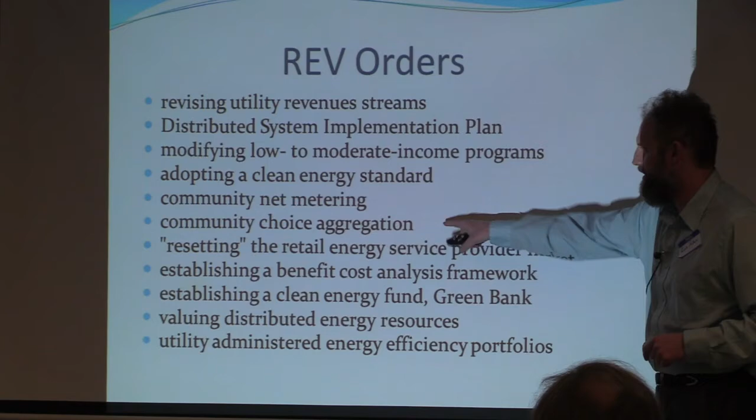Community choice aggregation, that's an ugly term for the solar gardens. So that's how you're going to get solar gardens in New York, and you can't do that in Wisconsin right now. There's an order resetting the retail energy service provider market. Complicated, I'll skip it. Establishing a cost-benefit analysis framework. So Gary was talking about those cost-benefit analysis frameworks his master's students are doing. They are actually doing those in New York.

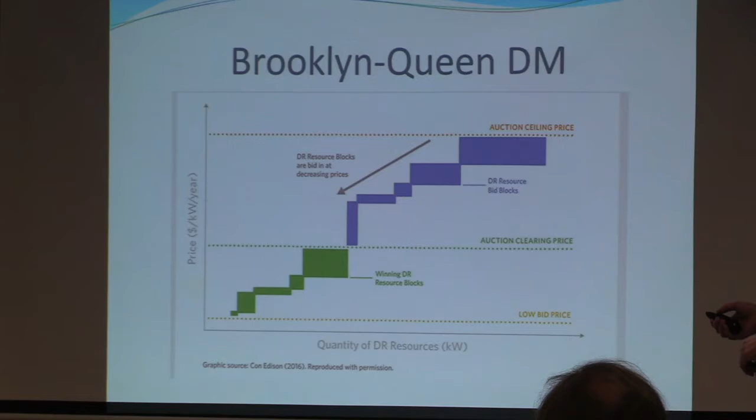There's a green bank to help on the financing side for distributed energy resources. And then there's a revaluing of the contributions from your solar to the grid. And then there's the energy efficiency portfolio. So it's a very extensive program of switching over the old system to the new system. And one of the really cool things, this is the program that got REV off to a start: there's a Brooklyn Queens Demand Management Project. I got the acronym spelled wrong here.

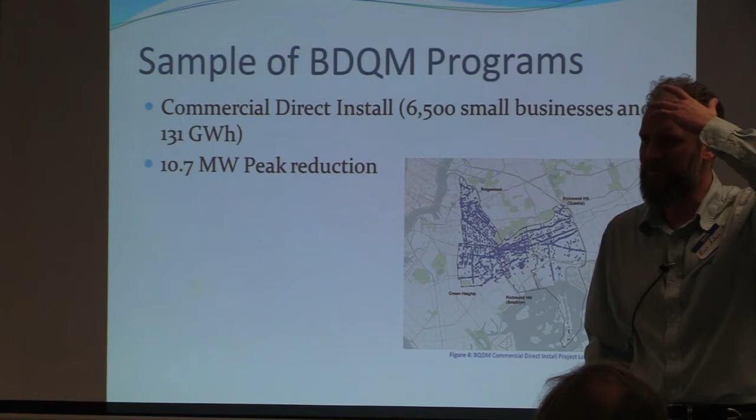But what happens, there's a substation in this area. It would have cost about $1 billion to replace, $1 billion. And so that looks like a really big capital expenditure. And so ConEd's first instinct is to replace it.

There's a couple of very well or fairly well financed energy groups in New York, PACE and NRDC, and they are ready immediately to pounce on this opportunity and say there is a better way to get the energy resources we need without doing a $1 billion expenditure. And in fact, it seems to be working quite well.

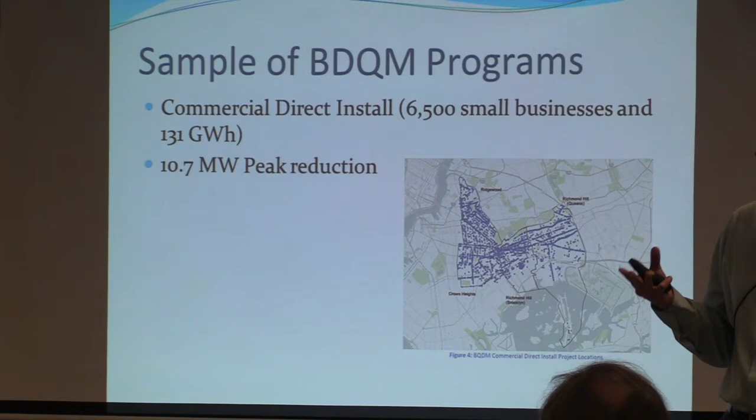What the New York Commission said is, okay, rather than doing this $1 billion capital expenditure now, we're going to put it off into the future. And instead, we're going to give you $200 million, $200 million instead of $1 billion, and you're going to use that money in order to do demand side management on the other side of the substation. So you don't need to replace the substation as soon as you thought you did, or maybe not at all.

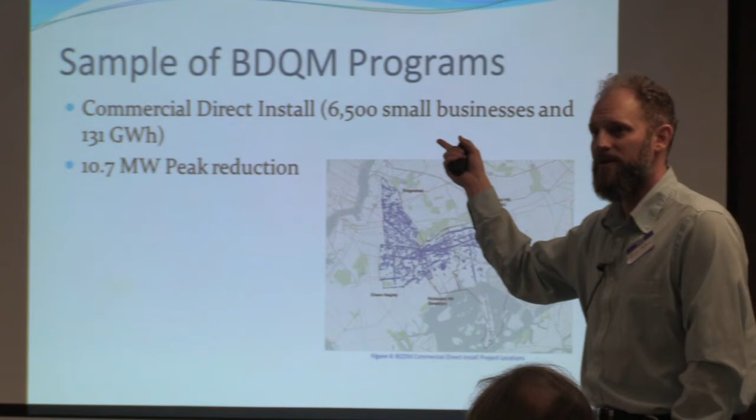And then you can take that $200 million and you can put it in your rate base. Right? So this means that the utility is getting paid for its work, and it also means that on the other side of the substation, the distributed energy resources, they're getting economic value out of it also. So what are some of the programs that they installed basically all on the other side of this substation?

So commercial direct install, that's exactly what it sounds like. ConEd would hire a contractor and they would just go to all the commercial facilities on the Queens side, their side of the substation, and go, hey, we'll change out your light bulbs or do energy efficiency for you, and basically make it free on the commercial side. They've got 6,500 small businesses, 131 gigawatt hours of energy savings. And one thing that's important here is how much of the peak is shaved off. So about 10.7 megawatts of peak is shaved off.

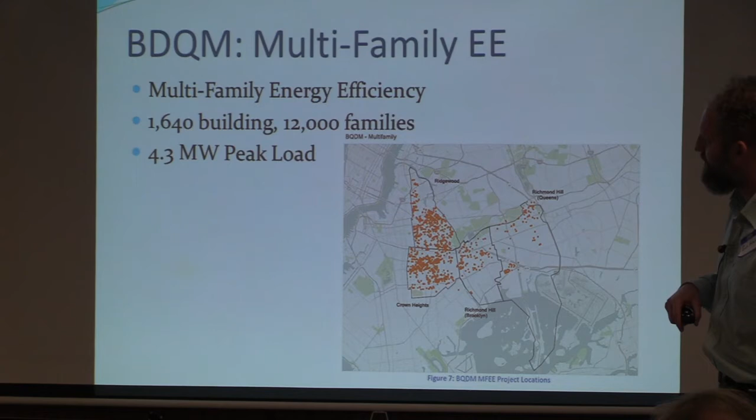Multifamily energy efficiency. One problem with apartment buildings is something called split incentives. So neither the landlord nor the renter have the full incentive to put up the upfront money for energy efficiency, and so it doesn't get done as well. And so Con Edison is performing that kind of energy efficiency for multifamily buildings. So there they got 1,640 buildings, 12,000 families, 4.3 megawatts of load reduction.

New York has a public housing authority, and so Con Edison and another couple of groups are working with that authority to basically change out the light bulbs in that public housing. So at this point, 18 public housing developments, 1.4 megawatt hours, and then they were able to make this program interact with a workforce development program, so 14 hires of young adults from low-income communities.

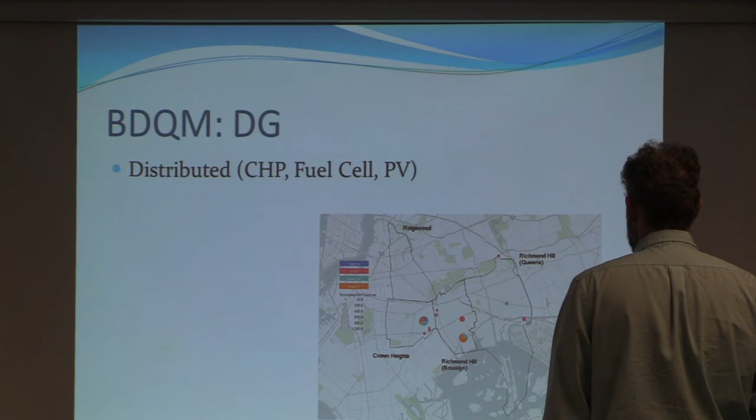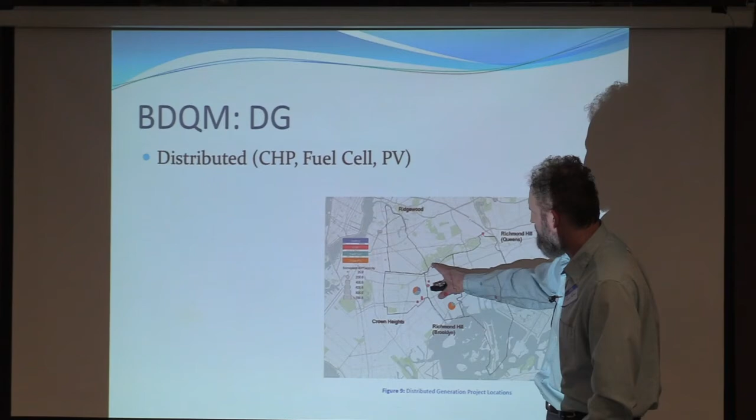There's also something called a dynamic resource auction, and then distributed energy is also being put up in Brooklyn and Queens. I've not been here, but if anyone knows this area, I'm pretty sure there's a lot of buildings, a lot of shade. I don't think there's a lot of places to put photovoltaics up here, but this is the distributed energy they've put up so far. So they've got some CHP, combined heat and power, they've got some photovoltaics, and they've got some fuel cells.

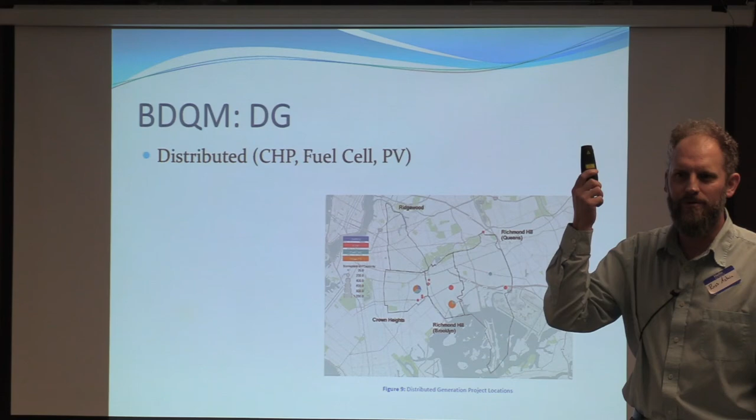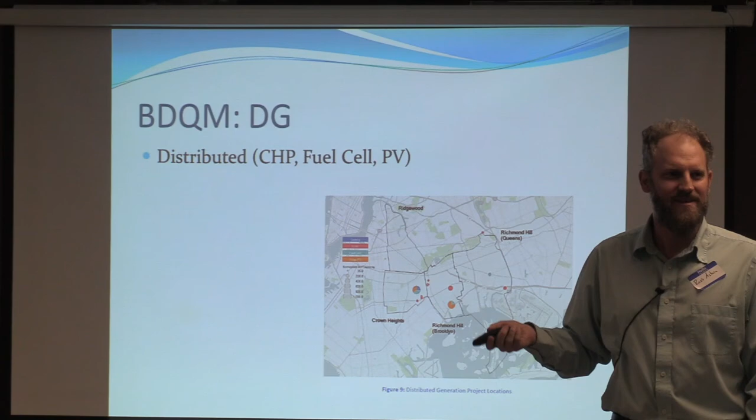And so what all that energy efficiency and all that behind-the-substation generation does is it means they don't have to change out that substation quite so much. So $1 billion. So you can think about that $1 billion substation perhaps as a transmission line, right? So if you're doing this in Wisconsin, what sort of transmission investments could you avoid? And I'll just say you're just not doing this. Like when Gary says we've got to make the economic comparison, that's the comparison we're missing out on doing.